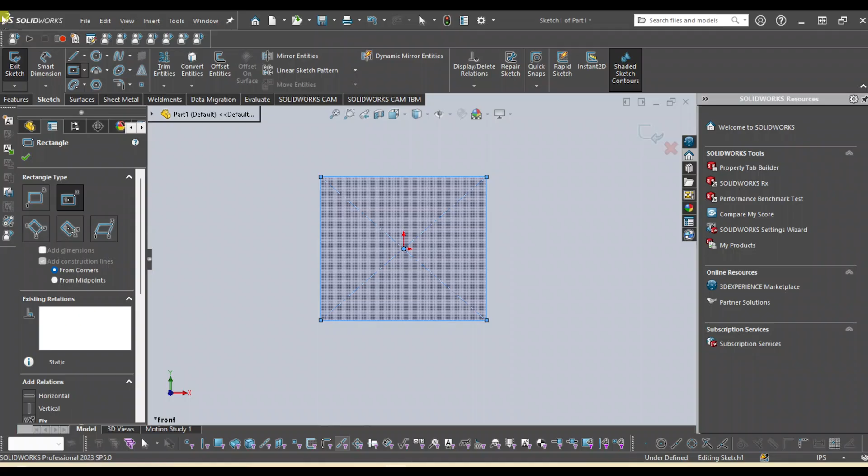Once you open up the SolidWorks window and open a new part, until here I believe you know how to do it. We're gonna create the smart dimension as 2 inches on the right, and then I'm just gonna put a relation which is the equal.

So this is the day 1 tutorial, we just go through the smart dimension and how to put the relation. If you're not very familiar with it, just go back to the day 1 video, I actually go through it in pretty much detail.

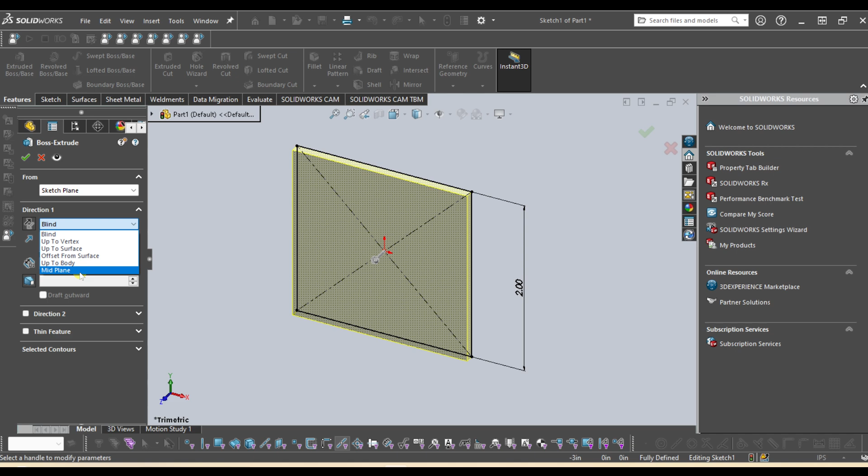So we're gonna go to the feature, then go to extrude boss and base, and we're gonna create basically the 2 inch kind of mid plane, and then it's gonna look like this.

The first feature that I want to have a look at together is basically mirror. What mirror does is, whenever you have a feature or whenever you have a body, that's gonna be mirrored based on a specific kind of plane. So I'm just gonna show you what it is.

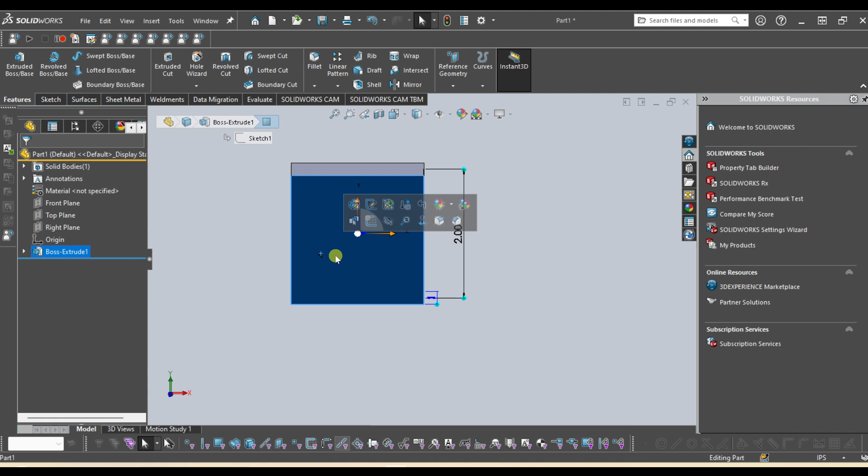On this front face, I want to create some type of hollow. For example, I'm gonna create a circle, put the midpoint, and put the smart dimension for this circle as 1 inch. So basically what I want is to extrude cut all the way back. How that's gonna look like is, I'm just gonna create a feature, extrude cut, and then we run.

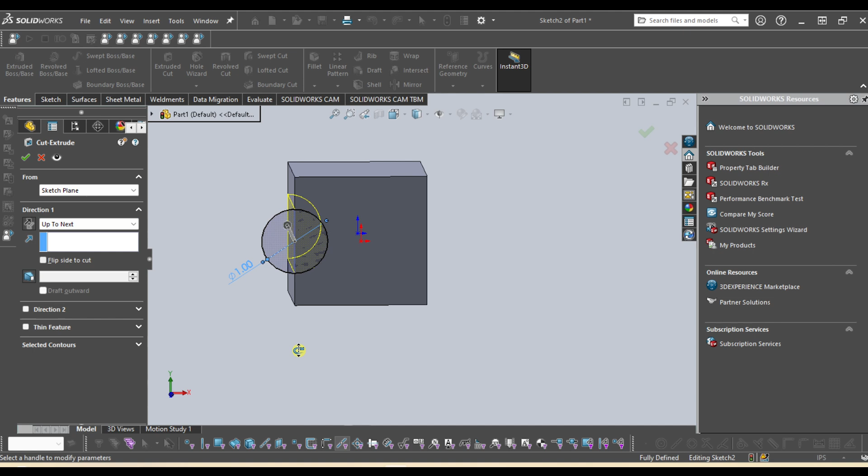There's a couple of ways we can do this, but for this time I'm just gonna apply up to next. Hit OK, and as you can see, this one is just making a hole. I know this is some type of random shape, but just to show you how the mirror feature works.

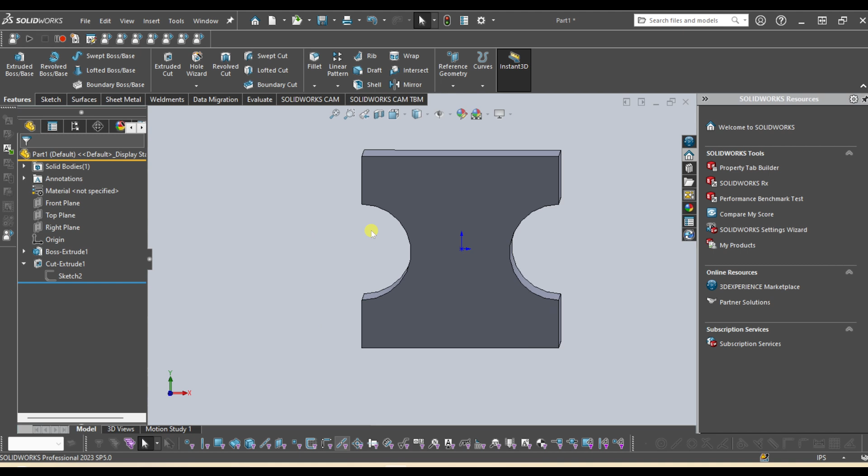So basically what I want is for it to be on the other side as well, this extrude cut having the same feature. The other way you can do is basically creating one more sketch, or go back to the sketch and create another circle, then click this one and click this one, and make it equal, then hit OK, and that's gonna do the same thing. But sometimes it could be really complex, so you don't want to do the same kind of sketch creation process one more time on the other side, right?

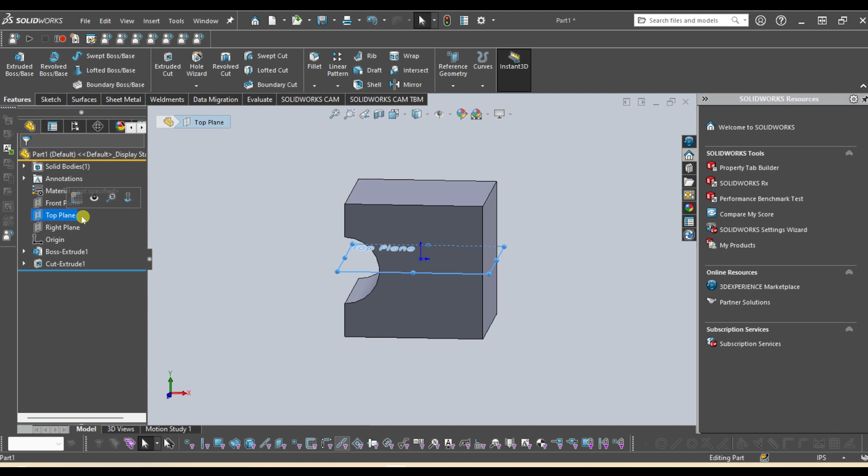So I'm gonna hit Ctrl Z to undo it, hit OK. For this time I'm just gonna apply the mirror feature. So we have to know which plane it is. By having a look, the front plane is not the one we want to use, top plane is not the one, but right plane is the one we're gonna mirror this feature against. Let's go to the top feature menu, and there is a mirror feature right beside the shell feature.

Let's just try hitting it. So we have to select the mirror face plane, which is what we just had a look at, right plane, and then secondary mirror face and plane. We are not gonna have a secondary mirror. What secondary mirror face and plane is, basically, sometimes we only want to mirror against only one plane, but sometimes we want to have the double kind of mirror, like 4 times a mirror.

So it could be also mirror to right plane, and also if you apply just the top plane, you can mirror two different ways at the same time. I'm just gonna show you in a future video, but for this time let's just have a look at some kind of simple, just one axis or one plane against mirror.

That's gonna be mostly used for the CSWA case. We are not gonna use any kind of secondary mirror feature for the CSWA. So for now, let's just focus on just 1 mirror face. And then we have to select either the feature to mirror, or just face to mirror, or just bodies to mirror.

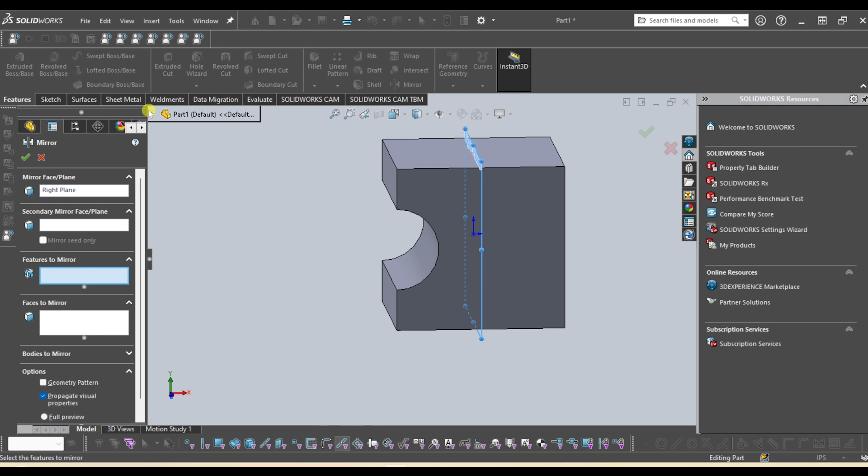Whenever you don't see any type of feature tree like over here, it's unselectable because there's no feature. Then you have to have focus over here. There's a right direction arrow - if you click it, the feature tree is going to be created. Okay, and then you can just select the cut extrude one, and it's gonna show the preview. Okay, and then you can just hit OK, and that's gonna do the same thing.

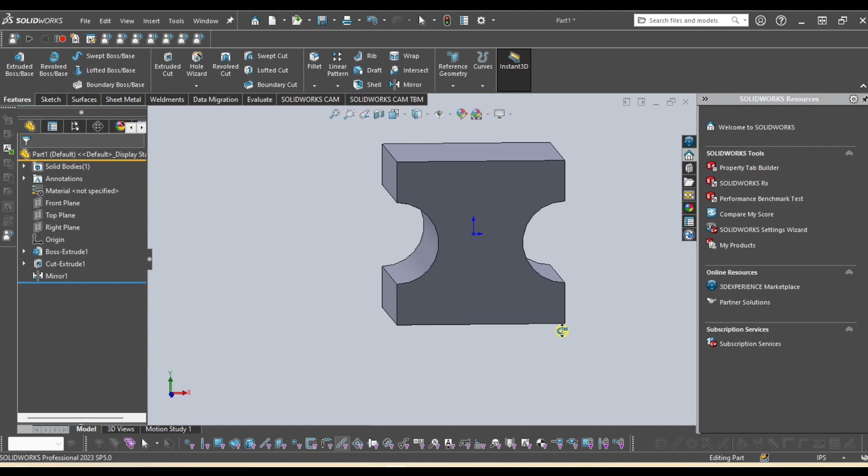That's perfect. And then the other thing I want to have a look at is, let's just delete these features. And then what I'm gonna do is edit, and delete these relations. And then I'm gonna delete this point as well, and move it a little bit to the left, and then I'm gonna hit this dimension as 1 inch.

Okay, I'm gonna hit 1.5 inch, and what I'm gonna do next is hit this relation as just 1 inch as well, so we can fully define, and then edit sketch, and it's gonna create the square feature on the left side.

So what we want is, for this time, instead of using feature, I want to try using mirror. I'm gonna select the same right plane, but instead of using the feature, we're gonna go to bodies to mirror. This is another most commonly used feature, so I'm gonna select this body and then hit OK.

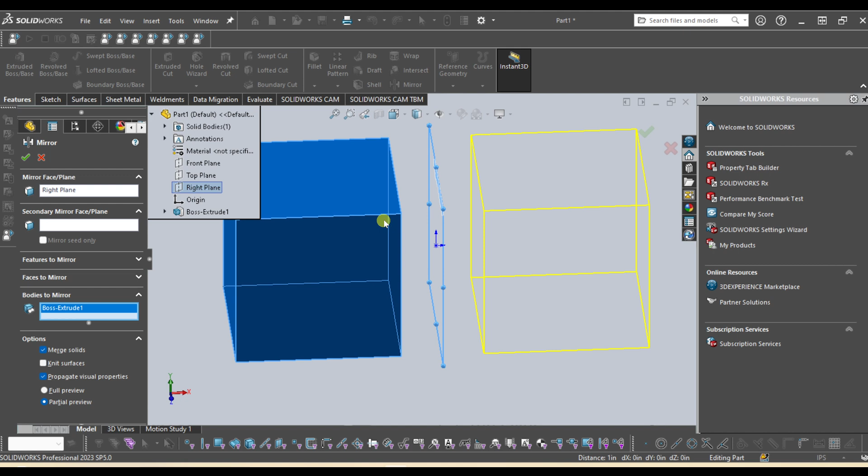And then what that's gonna do is show an error about whether to merge the newly generated body with the workpiece. That's because if you go here, there's a drop down menu with a merge solids option. So what that means is we're gonna create a copy and paste mirror feature, so there will be 2 features, but if we select merge solids, it's gonna merge them together, resulting in just one connected feature. But there's no connection between the first feature and the second feature, so that's what's causing this error.

So in order for us to have 2 different solid bodies without merging, you can just uncheck it and then hit OK, and that's gonna create 2 different bodies.

So if you go to the feature tree and open up the selection, there's a boss extrude one, and then there's a mirror three. There's 2 different bodies kind of features created. Okay, that's just one other way you can do it.

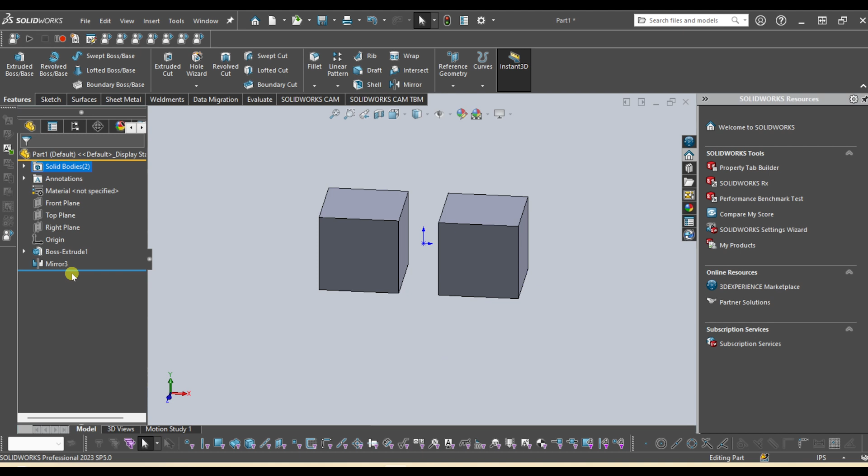And then mirror is actually pretty much everything, to be honest. I mean, there's a face to mirror, but face to mirror is just basically selecting a face to mirror against, so it's nothing very special. But feature and bodies - which body or which feature to mirror against - those are definitely the most commonly used. I never even use face to mirror very often, so don't worry too much about it.

And then other than merge solid, there's also knit surfaces. Knit surface is just more like a surface version of merge solid, kind of knitting together. So that's just another feature for surfacing cases.

And then propagate visual property is just basically populating some visual properties for the selected option. If you uncheck it, that's sometimes gonna result in the same result, but we normally check it to show the optimum visual shape of it.

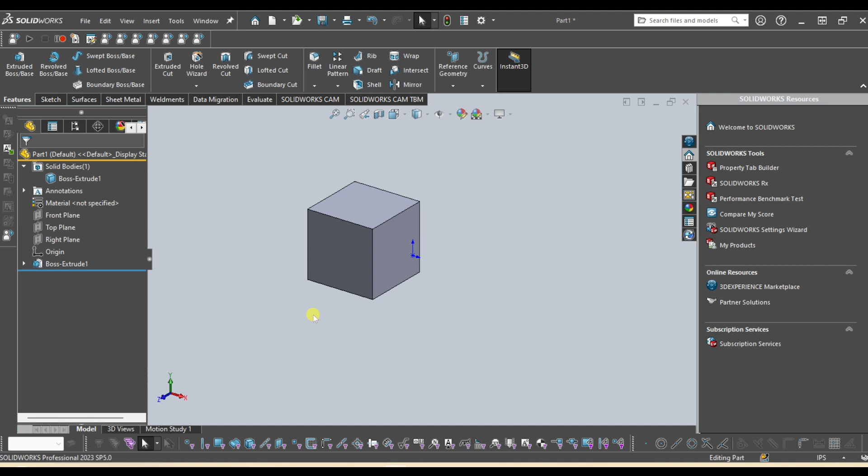Okay, so then the next feature we're gonna have a look at is basically patterns. There's so many different types of patterns - mirror just belongs to the patterns, but one very common feature is linear pattern, and there's circular pattern. It really depends on what kind of industry you're in. And then there's curve-driven pattern, sketch-driven pattern, table-driven pattern, fill pattern, and variable pattern.

But for our focus, basically our CSWA, which is Certified SolidWorks Associate certification - I definitely remember when I had a look at the criteria, we normally need linear pattern, circular pattern, and mirror pattern. Other than that, those are definitely more advanced features.

So when it comes to looking at more advanced certification programs such as the professional exam, then I'm gonna go through more detail. But it's always good to go step by step rather than running everything all at once and then forgetting it in your brain. That's gonna be definitely wasteful.

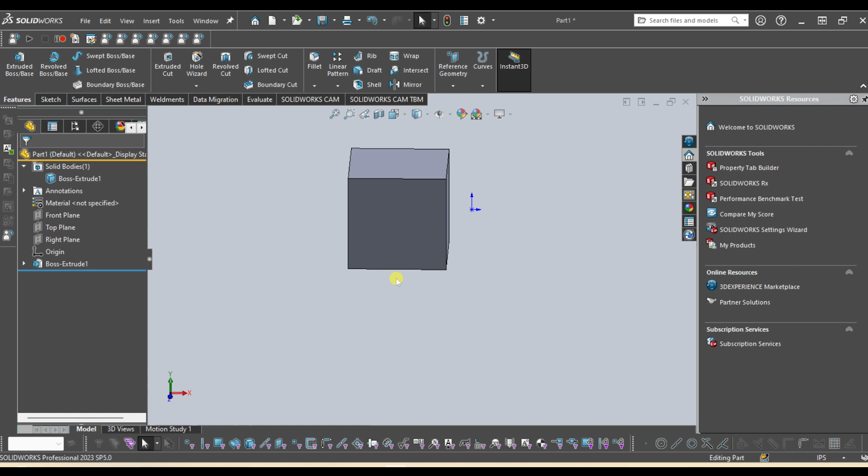So that is the reason I want to focus on some basic features which are going to be used for our certification exam case. The first feature we're going to look at together is just linear pattern. So what I'm going to do is go to the sketch, edit sketch here.

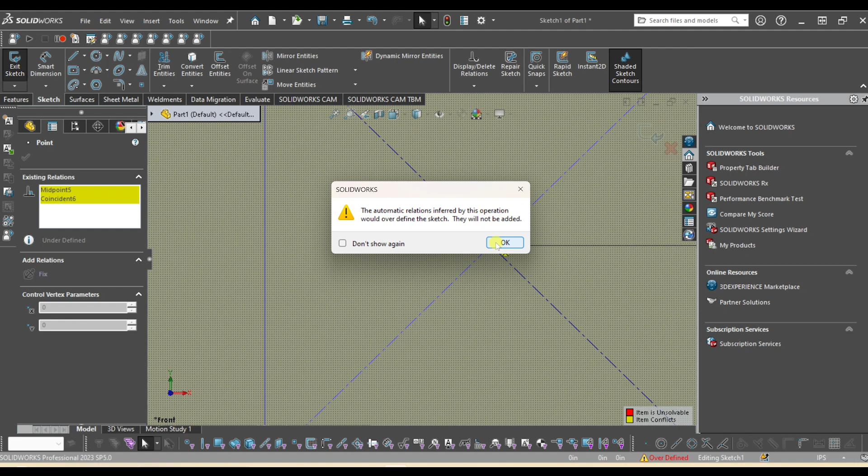And then I'm gonna delete this relation. One case is we can use this point to select this kind of orange dot button, and you can just move around or drag and drop at the center point, but it's showing some kind of over-defined error. So what you can do is delete this one, because this one and the center point are causing some kind of over-defined issue.

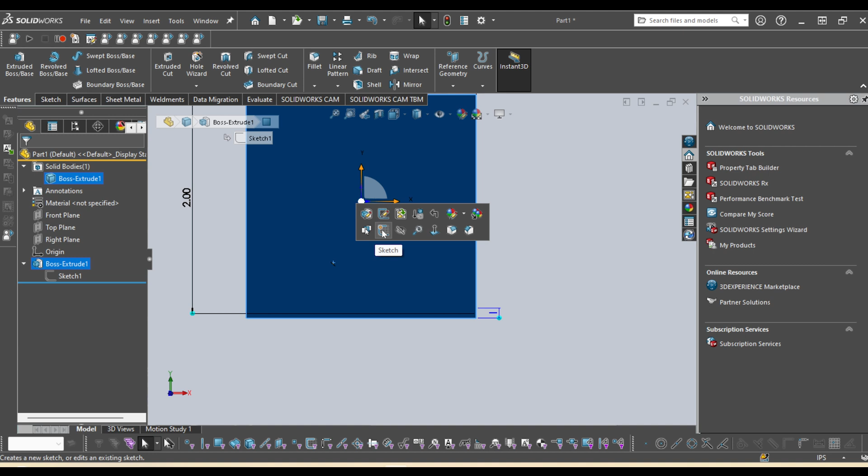So that's why this one has been resolved right now after deleting the 1 inch distance, and then hit OK. Then what we're gonna do is create a sketch on this front face, and I'm gonna create a circle which is just 0.5 inch. And then I'm gonna hit smart dimension, hit this one.

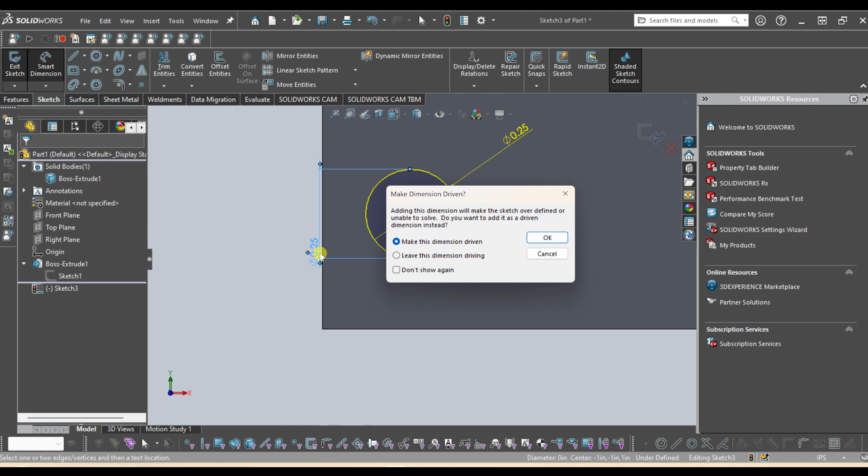One tip is if you want to locate this hole from the center point, sometimes you can select this circular kind of line or circular area, and then hit the left wall. You can also select this center point to the distance of the left wall. That's one way. However, sometimes it could be even easier selecting this circular area and then selecting this one - still selects the center point, so whichever you prefer.

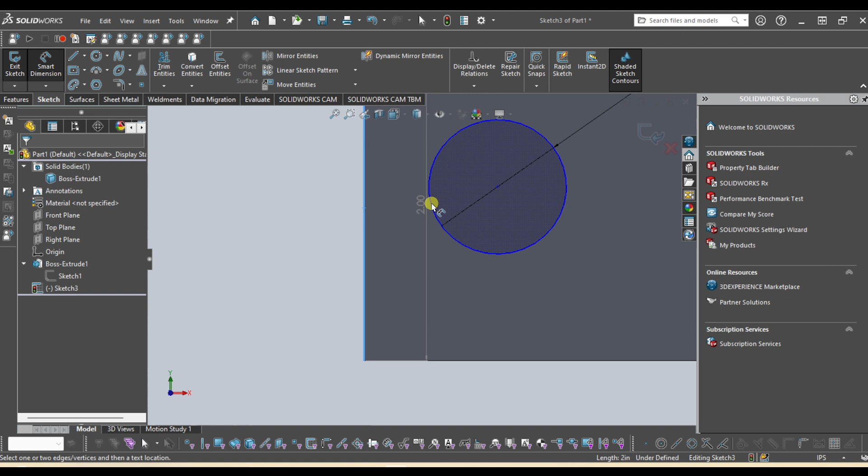But there will be a case where you have to select this kind of tangent line closest to the left wall - sometimes this happens. The way you can do it is select the left line, and instead of clicking this circular line, you have to press the shift button. Press shift and then hit this line, and that's gonna create a dimension that's closest to the left of the circular section. So that's the way you can do it.

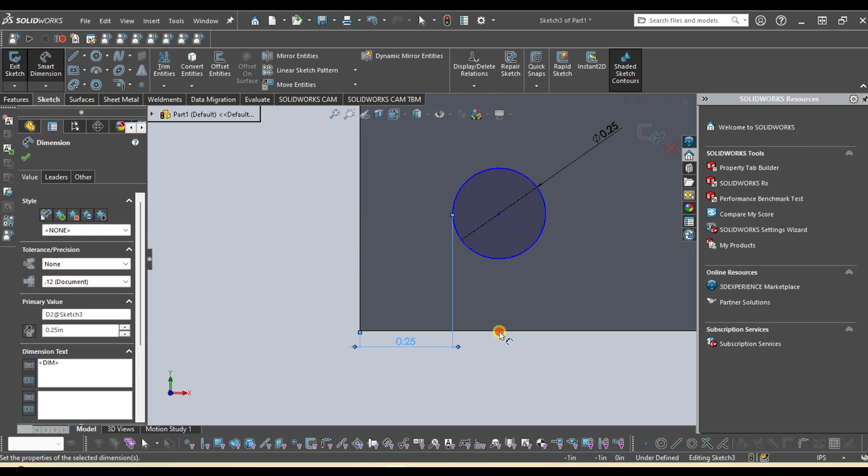So I'm gonna apply 0.25, and then do the same thing for the bottom - closest to the bottom side. I'm gonna hit the bottom line, then hit shift again, hit this circle, and put the dimension outside the box so it could be easily readable. Alright, so this one is fully defined, it's good to go.

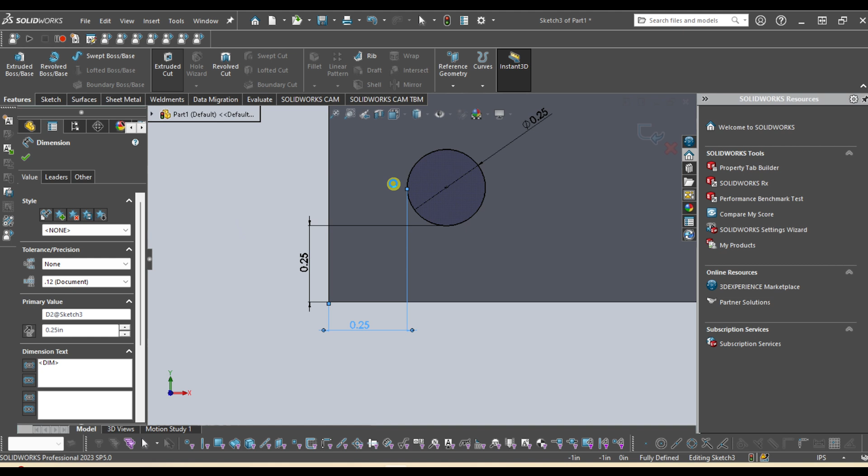And then what we're gonna do is go to the feature and hit extrude cut. I'm just gonna hit extrude cut for through all, or up to next - up to next is pre-selected, so it's good. I'm gonna hit OK. As you can see, there's one hole, fully go through, fully extruded feature has been created.

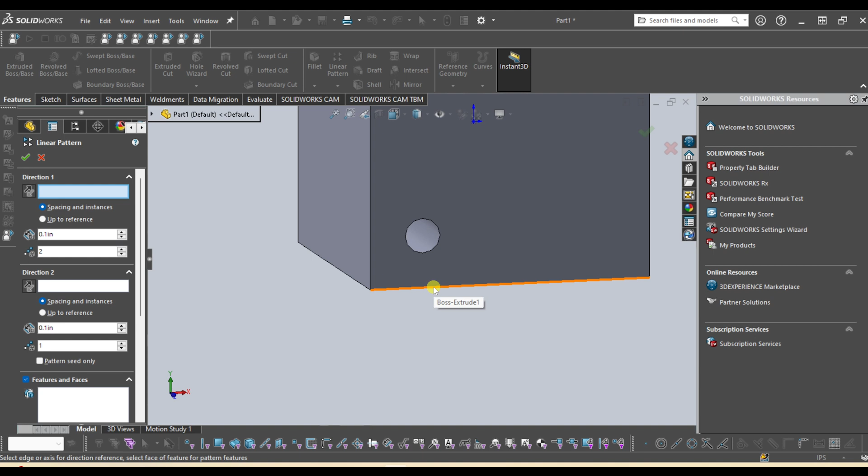So this is the time I want to create more holes in a regular pattern - this is the time we can use the linear pattern basically. It's gonna ask you to first select the direction, so you can select this kind of line, or there's a lot of ways you can select the direction. You can either select face, select the line, or even select the axis or construction line, whichever works well.

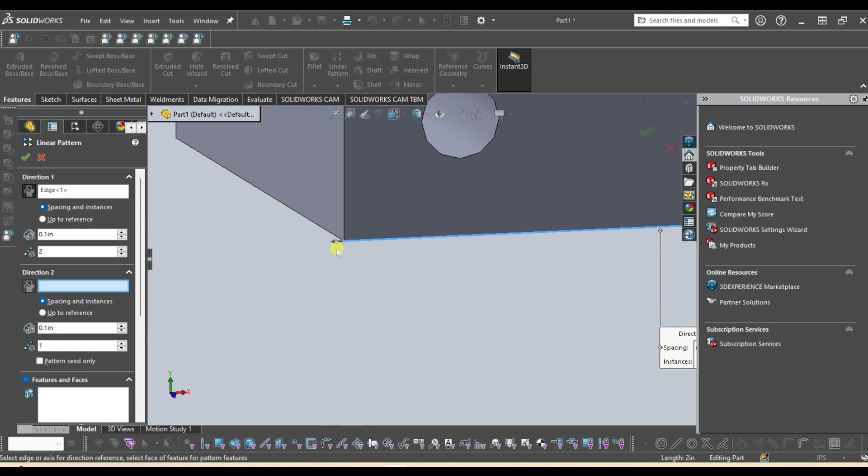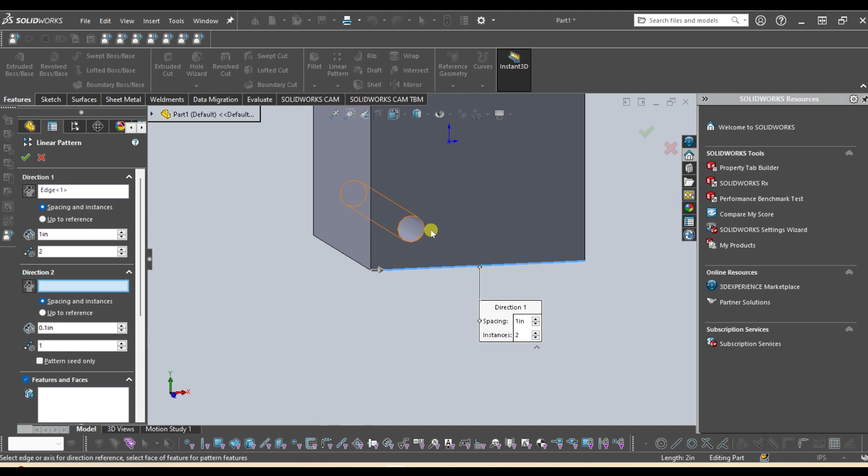For our case, we're gonna select this line, and it's showing some kind of gray arrow for directions. I just want to apply every 1 inch, create some more of the same feature, and hit 3 times, or just 2 times, only 2, to the other direction. So what I'm gonna do is hit reverse direction, applying more feature to the right instead of to the left, since there's not a lot of space.

And if you haven't looked at direction 2, I'm gonna go through it afterwards, but I'm gonna hit this one and open up the feature tree, hit this extrude cut. As you can see, there's one more feature that has been created, right?

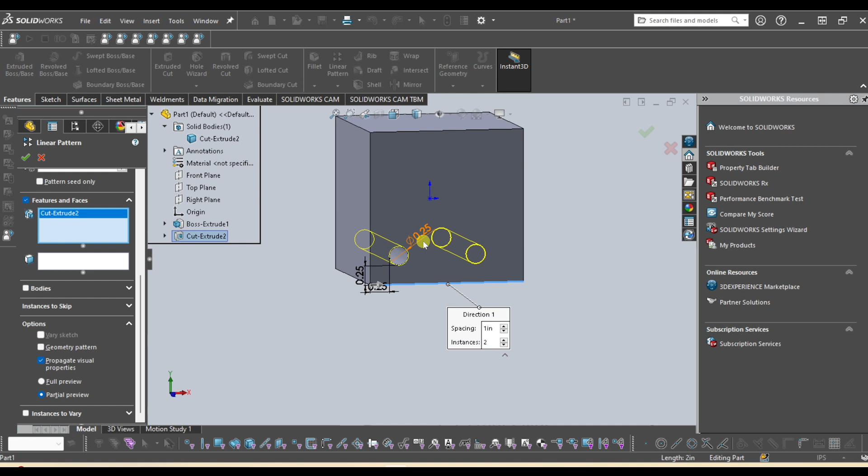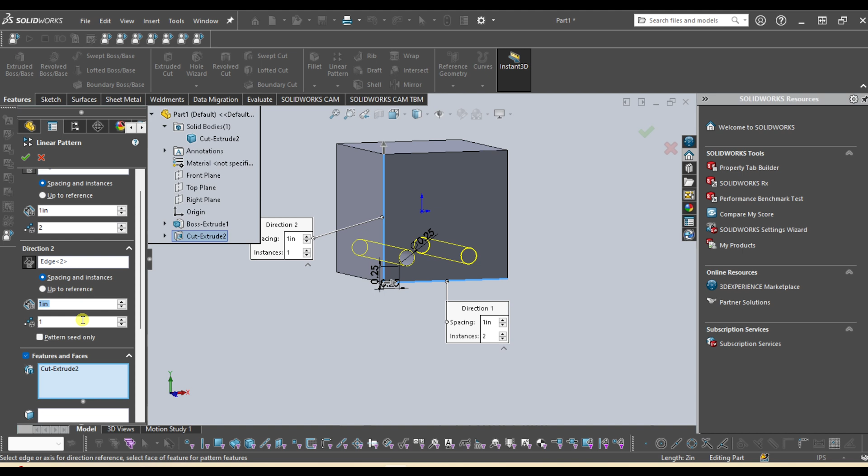But I want to create one more feature on the right side, and also at the same time hit the same distance as the top and also the diagonal, so it's gonna be 4 different features created by using this one. You can use mirror if you have a specific axis, but another way is you can hit direction 2, hit this line, reverse direction, then 1 inch, and 2 times.

Then it's going to create the exact same feature, the exact same distance for the right and the top, and also the diagonal feature, which is a pattern from the left bottom feature. This isn't only for two multiples - if this is 16 or even more different features that need to be regularly spaced from the origin point, you can see how powerful it is, just unimaginable.

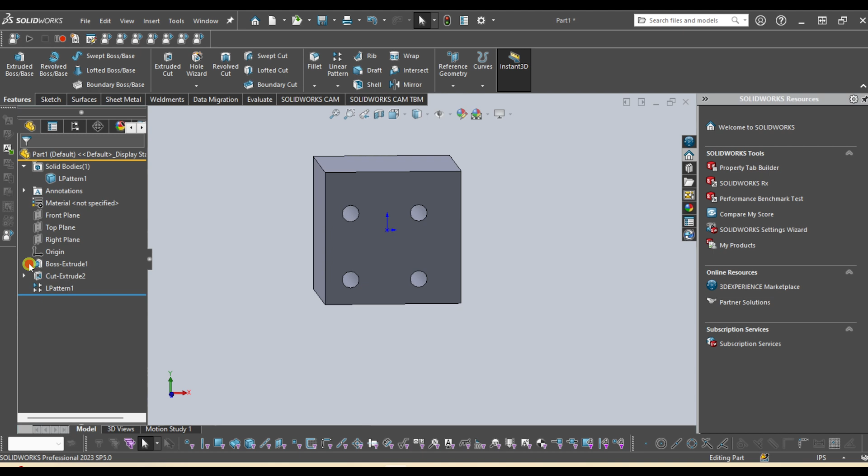That's why I keep mentioning the linear pattern and other features like this are super powerful. Instead of creating redundant sketches, using this method is going to save tons of time in your designing process. So yeah, this is good to know.

All right, so the next feature we want to look at is a little less commonly used for the sheet metal industry, but it's the circular pattern.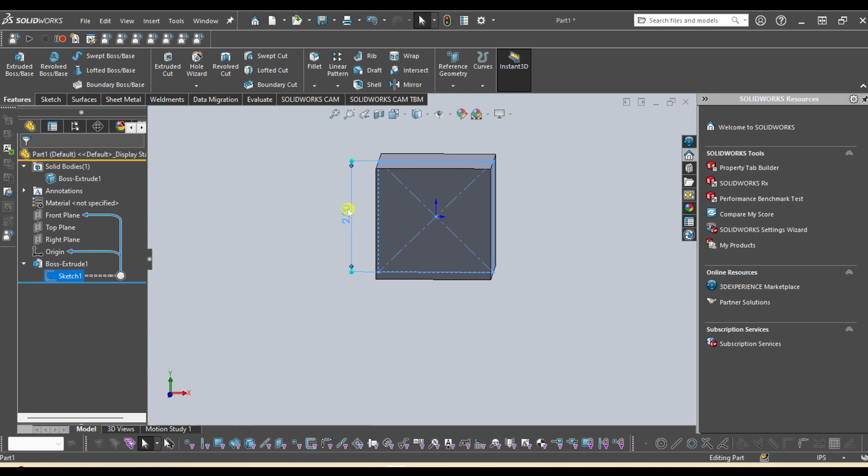So what circular pattern is - I'm going to delete this feature and sketch, and then click this sketch to make the size a little bit bigger, by 10 inches. The reason behind it is I want to make it bigger so we can see a little better for some circular features.

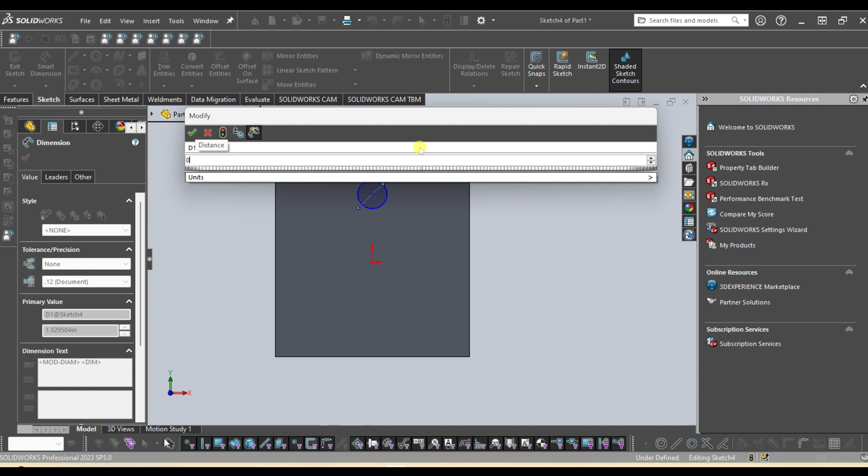So what I'm going to do is select the front face, and create a circle again at the top. I'll hit OK, smart dimension, and apply the point - let's just set it to 1 inch. Then put some distance from the center origin point to the hole center point, just 3.5. This is not too bad.

The reason this is still not fully defined is it doesn't have a good relation, vertical or horizontal. I have to put this relation. So what I'll do is click the center point of the circle, then click the origin point, and apply the make vertical relation. It's fully defined now since everything is black.

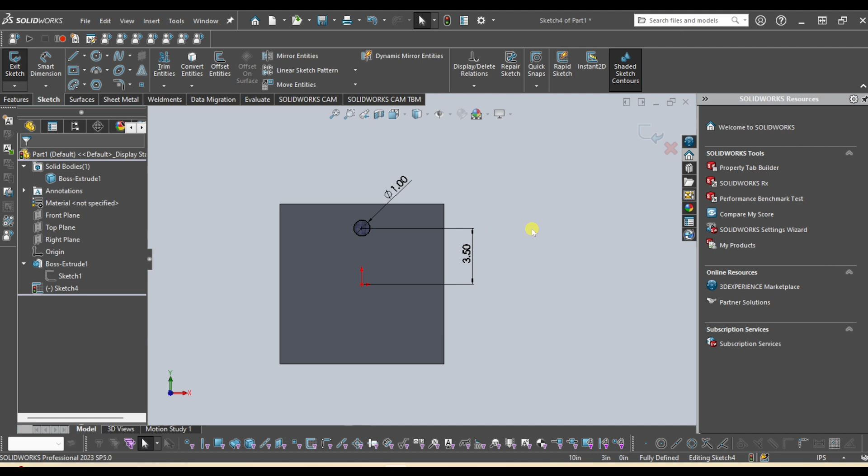Okay, now I'm going to go to feature, extrude cut, and what I'm going to do is set it up to next - that is good.

All right, so as you can see, another feature has been created, but this time what we want to do is create an axis.

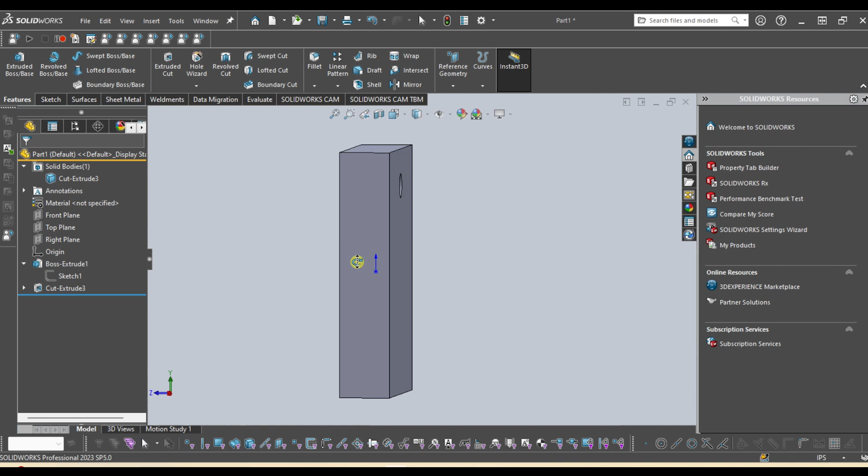What an axis is - if you go to the top, there's a type of shortcut button that's been created, the 'hide all types' and 'hide/show items' with a down arrow. If you hit that, there's a view axis and view temporary axis option. I just want you to click and activate the view axis, so we can see what kind of axis we created.

So this time we are going to create an axis. How we create an axis is you have to make sure you have two different planes that interfere together, so that interference line gets created as the axis.

So what I'm going to do is go to reference geometry from the feature menu, and there's the axis option over here, right? Let's hit OK. There are several ways you can create an axis, but for best practice, the most commonly used method is two planes.

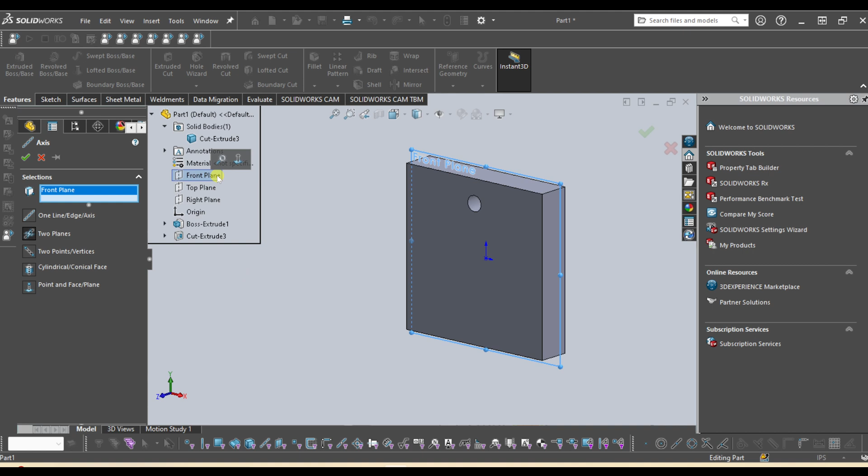So we have to find two planes that interfere, which could create an axis through the Z direction. Let's try selecting this front plane - no, actually this isn't the one we want. We want to select the top and right planes, which interfere - this line is going to be the axis we want to create. So we can create a circular feature or circular pattern against this center axis. I'll hit OK.

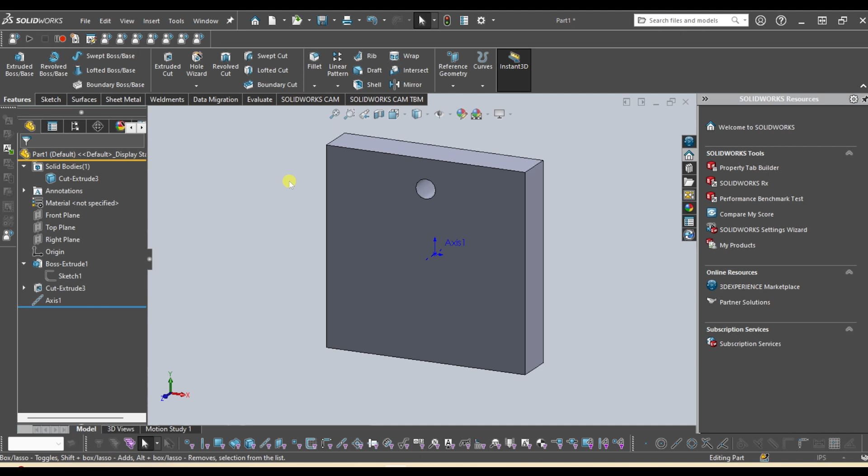Again, if you want to create an axis, go to reference geometry, and there's a drop down with an axis option. Once you create the axis, we'll go to the circular pattern, and there's a direction 1 we can select first, since we already created a good axis point.

Then you can go to the feature face, and there's a direction 2, but for this time let's just ignore direction 2. Then for the feature, we can select this feature, and manipulate it by 360 degrees.

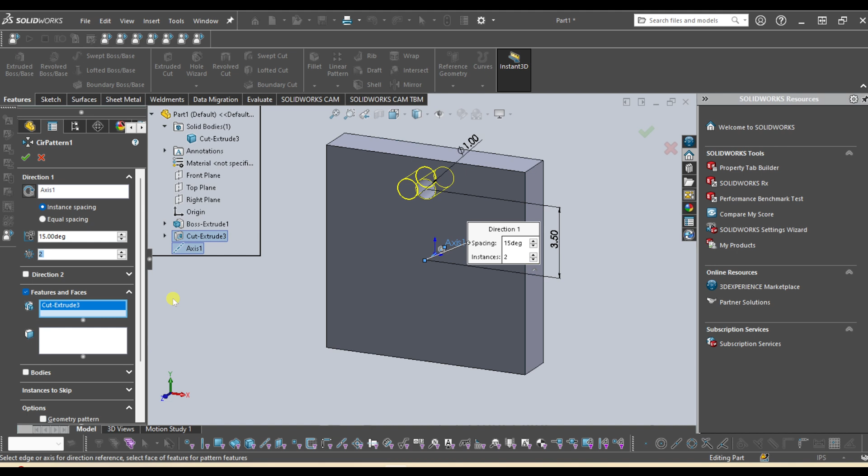I want to rotate all the way - how many features? I want this circular feature on the top, left, bottom, and right side. So we can select 360 one more time. I'm not sure what happened, but let's apply it.

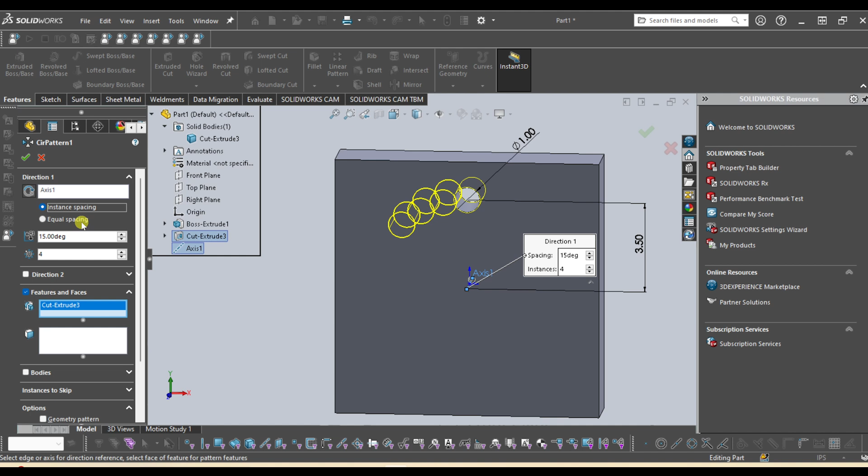The reason this is causing this type of shape, even though I tried to type 360, is there's equal spacing and instance spacing. If you hit instant equal spacing, it's going to turn into 360 degrees, but instance spacing is a different feature from equal spacing. Basically, equal spacing is just how many features in 360 degrees you can manipulate, but instance spacing is only for a certain portion of the degree where you want to create features.

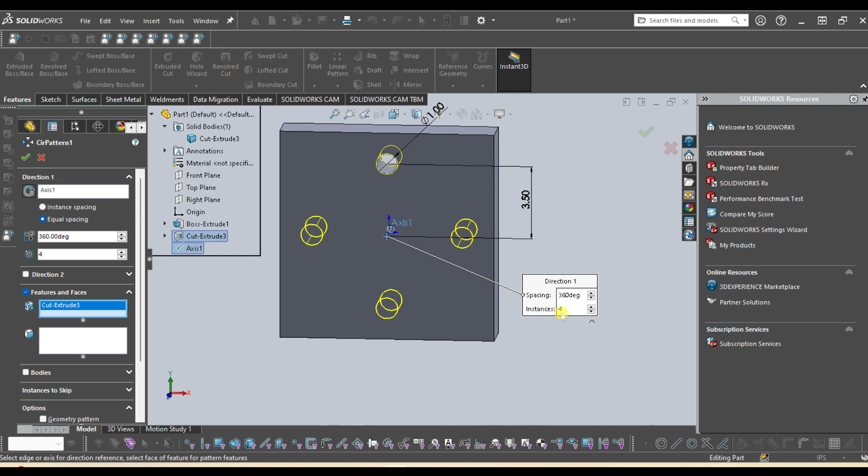So for our case, we're going to apply the equal spacing and hit 4 times, and that's going to show some kind of menu. You can also manipulate it doing the same thing over here, but more efficiently right beside the preview view. But I think this is good enough. Hit OK, and that's exactly what we want.

Now, the other thing we want to try is creating an axis against creating multiple bodies. So what we can do is pretty much a similar thing, but this time I'm going to delete those things and do it a little bit faster.

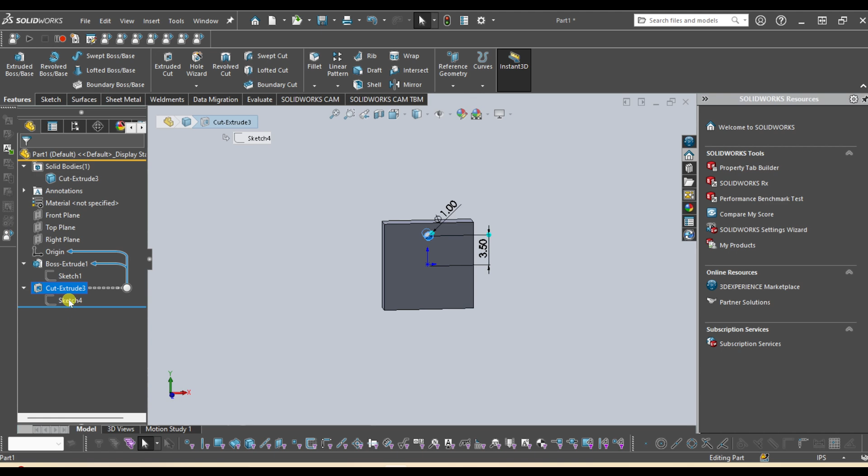I'm going to hit the sketch, go to the sketch, and what I'm going to do is delete those two relations so we can move it around.

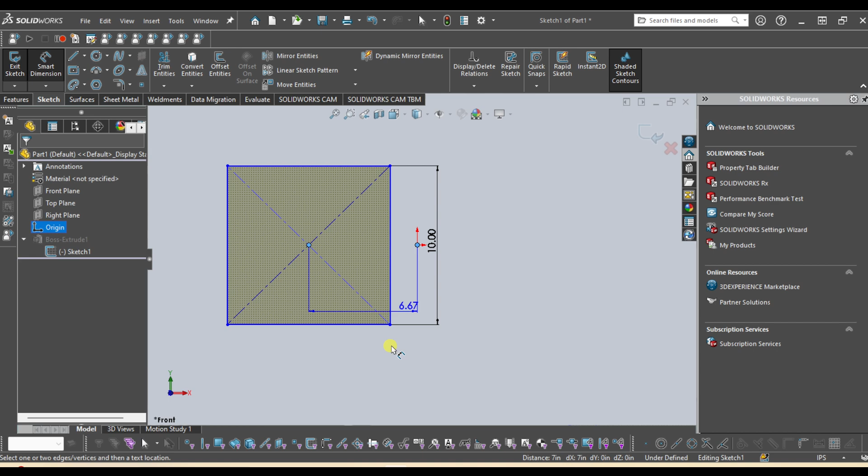I'm going to hit this point, the center point, smart dimension, and set a 10-inch distance from the center point. Still, it's not fully defined because there's no relation to the center point versus this origin point, so I'm going to hit horizontal. That looks good. And then I'm going to do the same thing again.

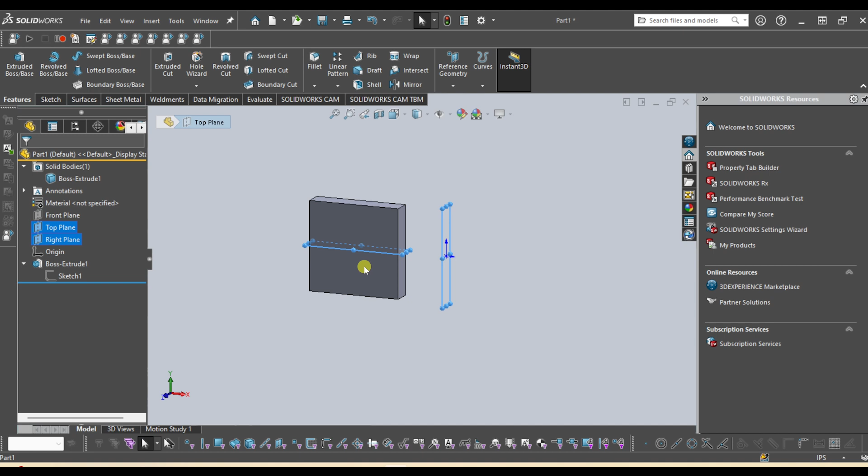Right now this plane is still interfering, because if you hit this toggle border button, you can manipulate and move around those top planes so it's easier to look. So I'm going to go to reference geometry, axis, two planes, expand the feature, top and right plane, and the same axis is created.

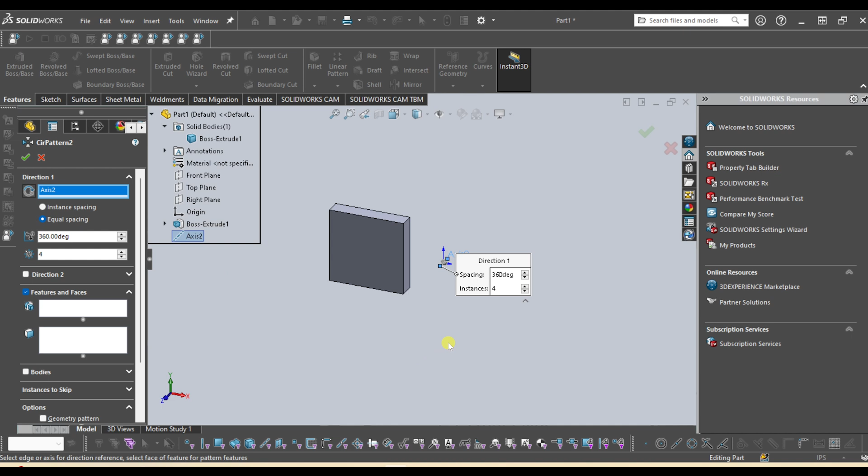This time, I'm going to go to circular pattern, select this axis, and create this feature on the bottom side, right side, and top side. For select your feature, we're going to go to bodies and select this body, then hit OK.

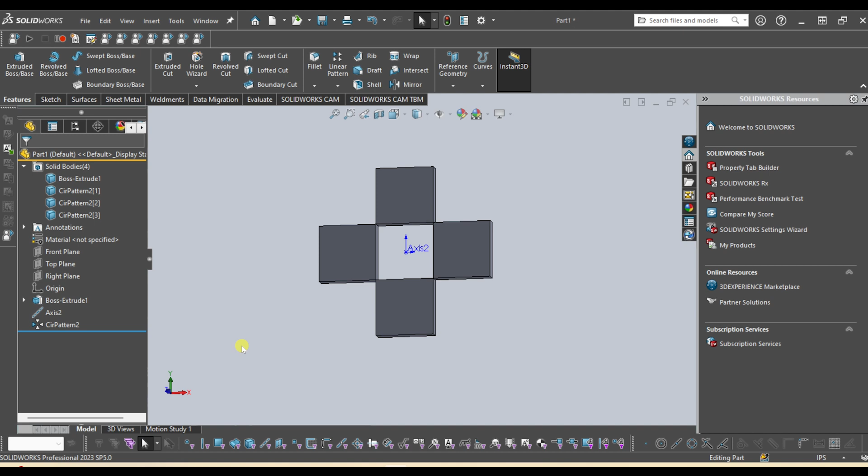So, pretty much that's exactly what we want. Basically, by using only one feature, you don't have to create multiple features altogether. So you can see how powerful this method is, but until you get used to it, you have to practice and fully understand how each feature functions together. Otherwise, you'll have a hard time not using this specific method and keep doing things the manual way.

I mean, there's nothing wrong with the manual way, but if you imagine being more efficient by using different methods, then there are more options you can select from.

That's why I keep emphasizing these things are definitely significant in our SolidWorks associate exam. And not only that, certification is only for your achievement and for proving how efficient you are, but a better goal for any designer or SolidWorks user should be what kind of ability and capability you have. The capacity of those different SolidWorks features is significant, because people are going to ask you for advice on many different types of features, and how fast you can design, and tips from your mind. So by practicing those, always practicing makes you perfect.

So just keep trying all those features that I went through today, designing one kind of pattern feature, and carefully looking at any kind of product around you. If you ever see some type of regular pattern in the features, you can try designing it in SolidWorks. That's definitely going to be a great asset for your learning curve. So just keep trying. All right, that's it for today.